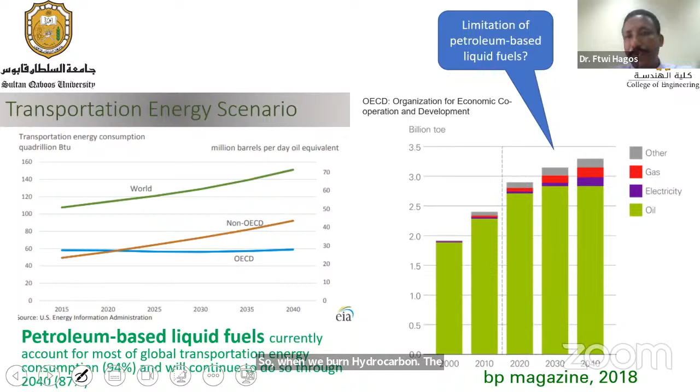So when we burn hydrocarbon, the limitation we have is because the carbon ratio in the mix is too much, then there will be huge generation of carbon dioxide. So the global CO2 emission from the transportation sector is one of the highest. As you can see from this figure, it stands at second.

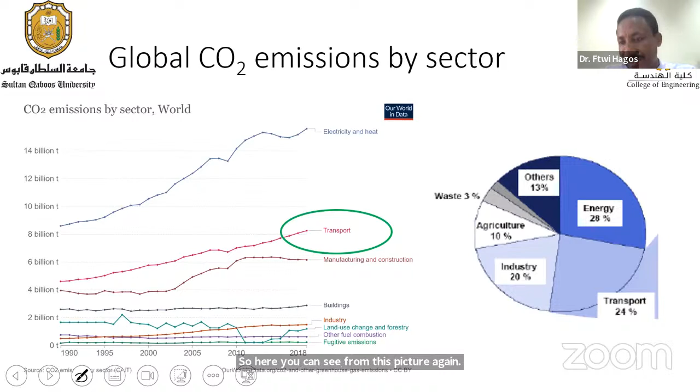Unfortunately, while the amount of CO2 production from the energy sector with some sectors is decreasing, with transportation it is still increasing at an accelerated level. So here you can see from this figure again, the transportation sector stands second in the generation of CO2 emission. And out of this, road transport is taking around 74.5%.

Based on this prediction, by 2050 the transportation sector will emit around 12 gigaton of CO2 equivalent per year, which is up from the current 8 gigaton of CO2 per year.

So these are the main challenges which the world is trying to address in many ways.

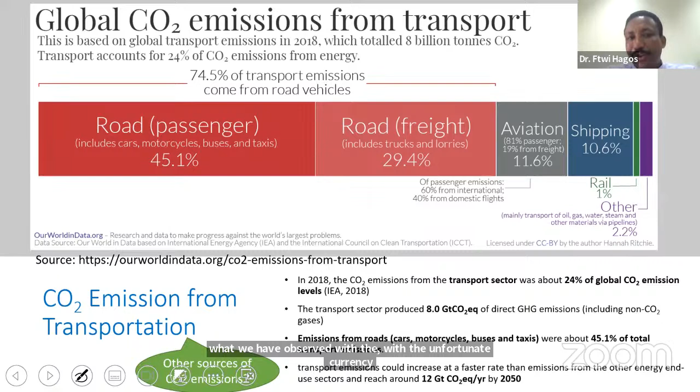What we have observed with the unfortunate occurrence of COVID-19, in fact, it was a blessing for the energy sector, especially for emissions. It was like a rally for the world, so there was a decline in the production of CO2. And of course, there was less activity, and as a result we had less consumption of energy, and subsequently we had less production of CO2.

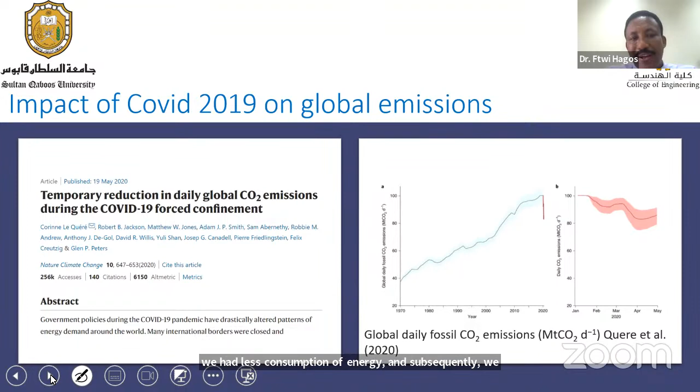Unfortunately, immediately the recovery started, the production of CO2 also picked up. Even though there was a discussion by world leaders that recovery should proceed in a sustainable way, many countries preferred to continue the same old way. So many of them dropped that intention and started exactly the same carbon-based path. As a result, by 2021, the energy-related CO2 emission grew by 6%.

So my topic today is more towards the mitigation aspect, with hydrogen as part of the mitigation process. There are many ways we can mitigate CO2 emission from transportation.

One way is energy intensity reduction, just minimizing the amount of energy we consume. Well, with the current trend, that may contribute a little, but it cannot be the only solution. But if we try to reduce the carbon intensity of the energy source, that can contribute a lot while generating or utilizing more energy, but still with less effect on the environment.

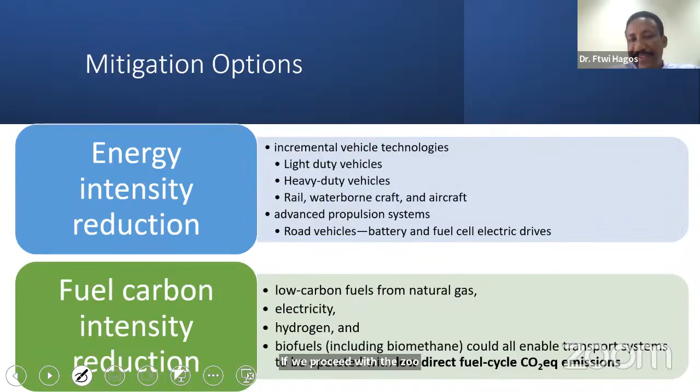There are different sources of energy which can be categorized as zero emission technologies, and there are lots of advantages and disadvantages associated with them. Our current practices are mainly focused on biofuels, synthetic fuels, bio-based fuels, or alternative fuels. Their impact is not as such because we have a wide range of limitations with them.

Like, for example, if you consider biodiesel, even though it has huge potential, we cannot utilize it fully into our current engines. So the only way we can use it is by blending it with carbon-based fuel. The same is true with bioethanol and bioalcohols. And with the others, like hydrogen energy as a combustion engine fuel, or hydrogen energy as a fuel cell fuel, or battery electricity.

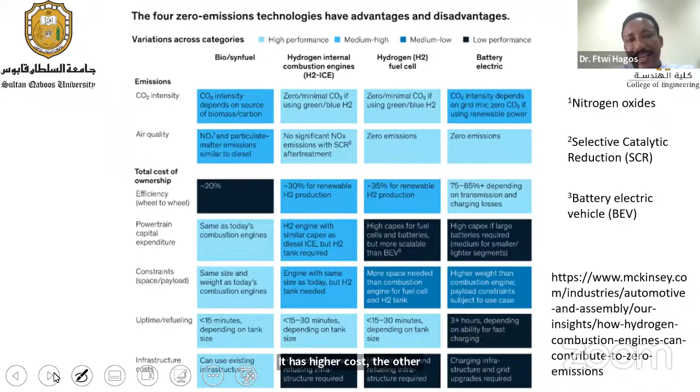Then the limitations with battery electric, what we have is, one thing, it has higher cost. The other thing is it has lower capacity, especially with the energy density. It has 400 megajoule per meter cubed in comparison to 34,600 megajoule per meter cubed of gasoline.

So this is one of the biggest barriers, in addition to those mentioned in the previous slide. And as you can see from the market aspect as well, because we have not much alternatives on the market, still the market for electric vehicles is growing, but the growth doesn't take into consideration the huge demand available for the vehicle market.

So as you can see, the current state of the market, in 2021 around 16.5 million cars were on the world road. In fact, this is an increase from 2018 by 3 times. And in 2022, in the Q1 market, about 2.2 million electric vehicles have been sold. In fact, half of the market is available in China.

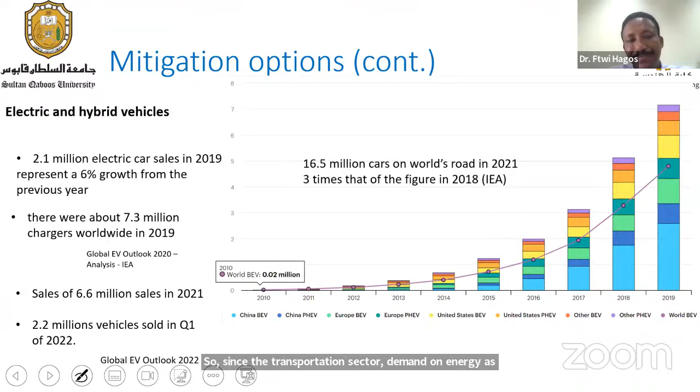So since the transportation sector's demand on energy as well as on vehicles is huge, we cannot substantiate with electric vehicles only. So we need to think about hydrogen fuel cell as well as hydrogen combustion engine.

The challenge with this: still the technology is recent, so there is more to be done, especially to expand the market.

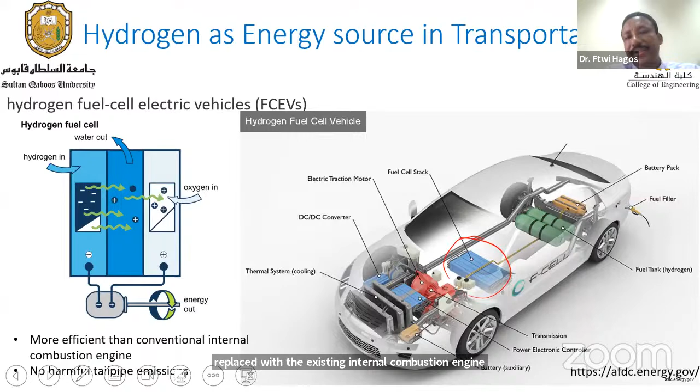As far as the hydrogen internal combustion engine is concerned, the setup is similar. The only thing is the fuel cell is replaced with the existing internal combustion engine. So hydrogen is utilized as fuel with existing internal combustion engines, more preferably spark ignition engines, but there are also efforts to utilize hydrogen energy in compression ignition engines. And there are also works underway to utilize hydrogen energy in the aviation industry.

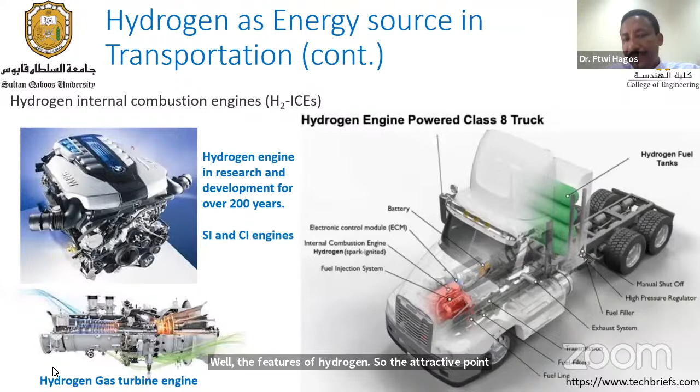So what are the features of hydrogen? The attractive points here are the energy content and the wide range of flammability limits, the higher auto ignition temperature, and higher octane number, which are more convenient for improving the efficiency of the combustion chamber.

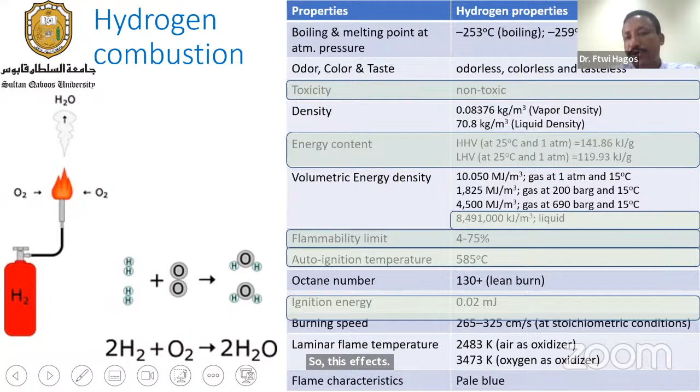The other thing is about the burning speed, which has higher laminar flame speed, and also the laminar flame temperature is high. Because of this effect, the combustion efficiency can be improved, but we have some challenge, especially with higher laminar flame speed: controlling the combustion process is a big challenge.

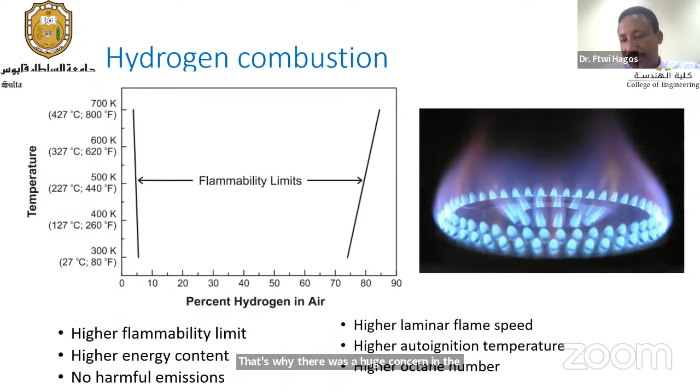That's why there was huge concern in the past. Hydrogen energy in the combustion chamber is not a recent scenario; it has been in research and development for over 200 years. We have 4 stages or phases in hydrogen usage for internal combustion engines: the early 19th century, the early 20th century, the 1970s fuel crisis, and the current one. The current one is motivated by the decarbonization drive, and hydrogen has become a center of focus as a result of its potential for long-term storage of energy.

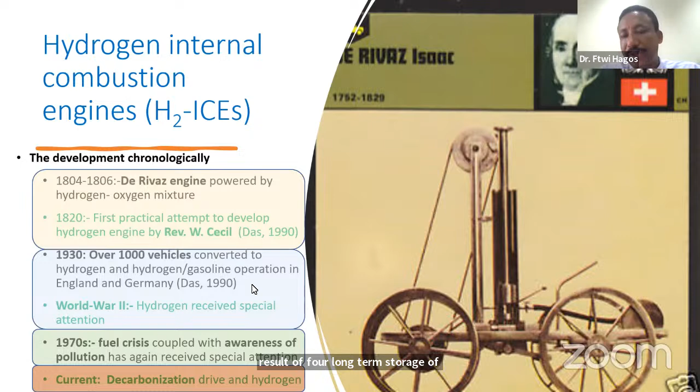So the challenge in the past was that the production of hydrogen itself was based on carbon-based fuels. Because of the production of hydrogen, up to 830 million tons of CO2 used to be produced. So hydrogen was not a solution in the past because it was being produced from carbon-based fuels.

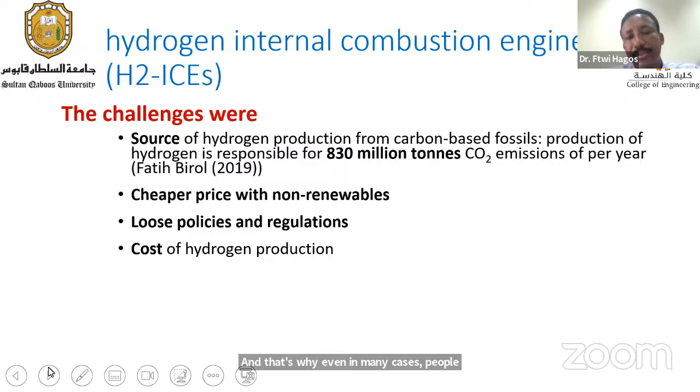The other challenge is cheap prices of non-renewables as well as carbon-based fuels, and loose policies and regulations which were not favorable for the use of hydrogen as a fuel. Cost of hydrogen production itself in the old days was quite expensive, and that's why in many cases people used to prefer to use syngas instead of hydrogen.

Storage of hydrogen was also a challenge. Nowadays, because of innovations, this issue has been slightly solved. And combustion related, as I mentioned in my previous slide, combustion control is one of the concerns.

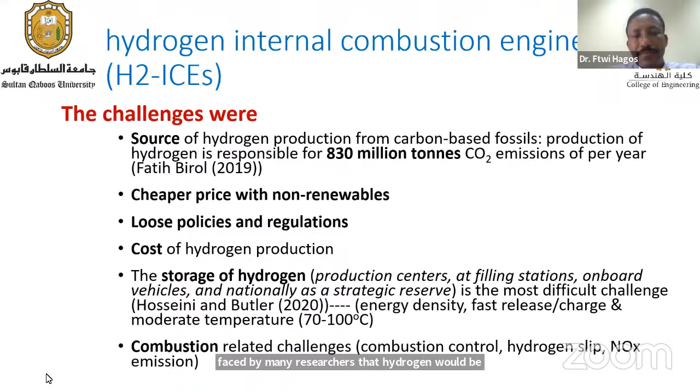But despite all these concerns, it was prophesied by many researchers that hydrogen would be the sole non-petroleum based commercial fuel in the future. This was stated by Prof. Das in the 1990s in one of his papers in hydrogen energy.

So what has been changed in recent years? Excuse me, Prof. Ftwi, I think we have 5 minutes left. Thank you.

All right, okay, I will try to conclude. So we have some driving factors or driving forces which have led us to change our status quo, among which are some listed here. Because of this challenge, many countries are shifting towards renewables, and decarbonization has been the motto for the world now. Net zero emissions have been proposed by 2050.

Share of renewables is increasing globally. When we are designing renewables, because of their intermittent nature, we need to design with higher than their capacity, because we need to look at the base load. So there will be surplus of electricity when they are generating at their peak, and as a result we require long-term storage. Now hydrogen has started to serve as a long-term storage.

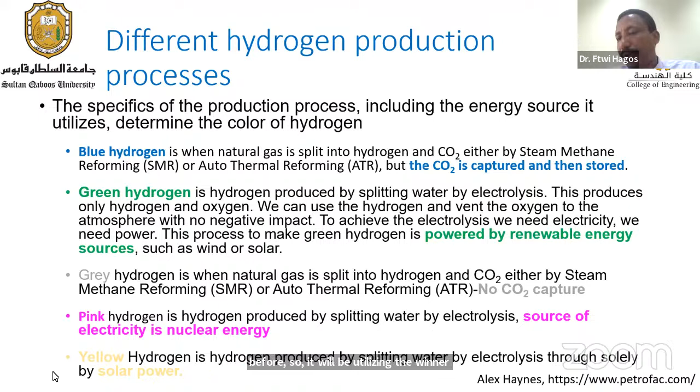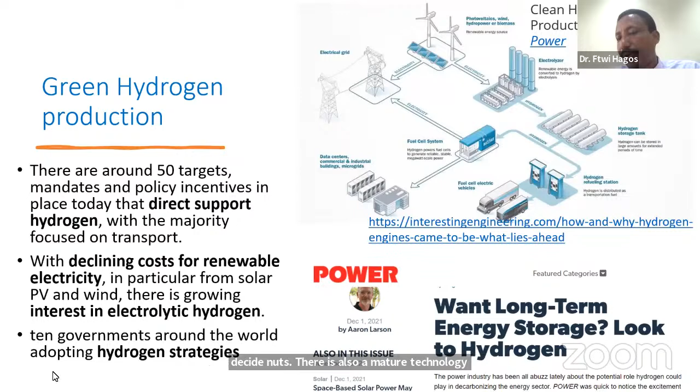So the green hydrogen production, I will not say more about this, it is quite the same thing I said before. It will be utilizing renewable energies for the generation of hydrogen by the electrolysis process. There are advancements in the electrolysis process, and the cost of production is reducing. Besides that, there is also mature technology on the combustion of hydrogen. Combining this, green hydrogen can serve as a means for the supply of energy to the transportation sector.

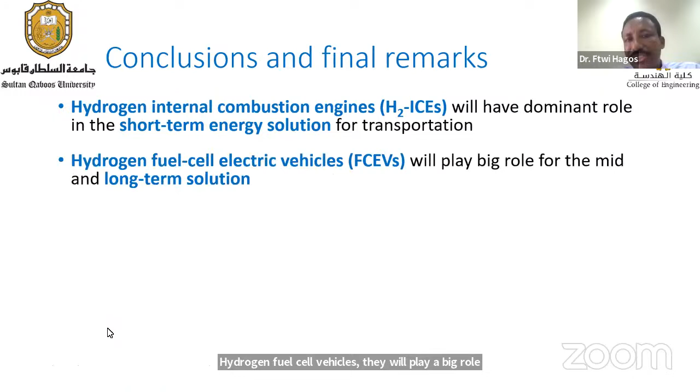So as a conclusion, hydrogen internal combustion engines can serve us as a short-term energy solution for the transportation sector. Hydrogen fuel cell electric vehicles will play a big role in the long term. The hydrogen energy market should be supported with infrastructure expansion as well as improving current policy and regulation. But the most important thing is addressing the global warming issue related to hydrogen, which requires controlling leakage in the upstream as well as the downstream. So hopefully, hydrogen will serve sustainable development.

Let me get back to one more important thing I forgot. We are requesting the original equipment manufacturers to give us different solutions while we are demanding them to give us electric vehicles. On the other side, we are asking them to give us fuel cells and internal combustion engine vehicles, then different technologies of internal combustion engine vehicles. So when the demand is diversified, the OEMs are also being stretched, and as a result they are failing in everything. This is also another challenge. So the world should have to be consistent with one form of energy source for driving our vehicles.

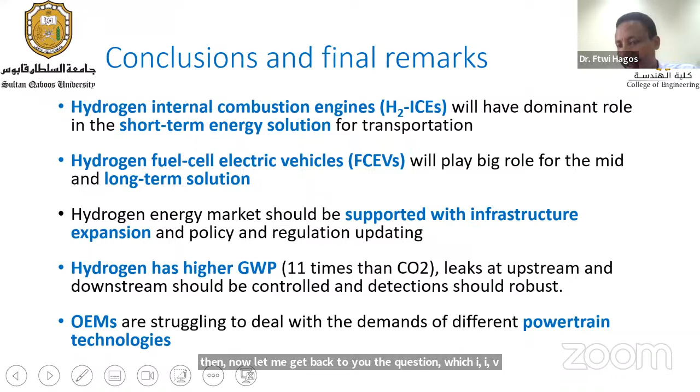So having said that, let me get back to the question I raised previously. Does my presentation address the question? Still not. I'm not here to just give an answer, because if I give an answer, it's like a promotion. The question will motivate us to think and to look after this, so it will be like our communal effort to address the issue and participate in the process. With that, I have finished my presentation. Thank you all, I really appreciate it.

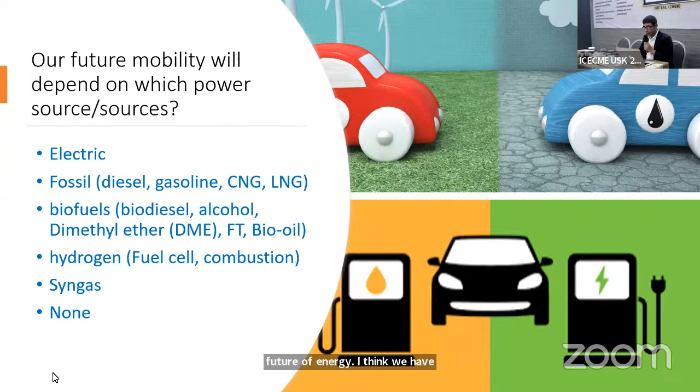Please mention your name. Thank you very much, Dr. Ftwi, for the presentation. I have one question about the future of mobility based on green energy. How about the economical side of these projects? I can only imagine the electric car is quite expensive, so not everyone can afford it. How about your research? Thank you. Oh, my name is Raihan. Thank you.

Yeah, you can answer directly. All right, thank you very much. So this is a very good question, and yes, the economic aspect should also be taken into consideration.

As I mentioned in my presentation, the motivating factor for hydrogen as a sustainability option is the economic aspect as well, because the cost of production of hydrogen is declining. Also, the production of hydrogen is not purely for generating hydrogen only. We are using hydrogen as a means of storage for surplus electricity production, so we are killing two birds with one stone. That will help us decrease the cost of energy in the automotive sector further. So that's the aspect we have here.

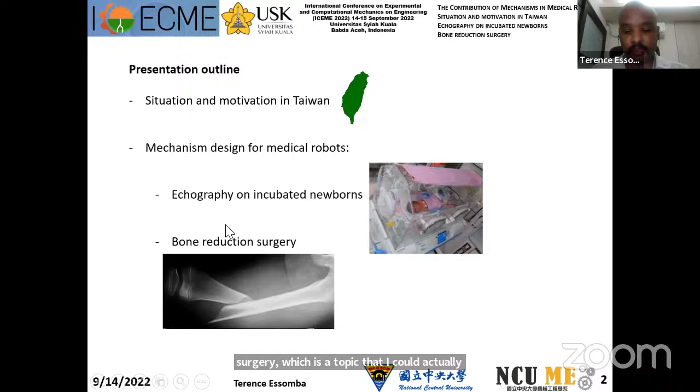Okay, please. Okay, so again, thank you, Dr. Irwansa Idram, for this nice introduction. My name is Terence Essomba from National Central University in Taiwan. The objective of this presentation today is to introduce the contribution of mechanism science and mechanism design to the design of medical robots. In this presentation, I will first briefly introduce the situation in Taiwan on medical robots, and then illustrate two examples, two medical applications that I personally addressed with medical robots. The first application will be echography on incubated newborns, and the second application will be bone reduction surgery, a topic I actually collaborated on with Professor Irwansa Idram.

So let's start with the situation and motivation in Taiwan. Taiwan is considered to have a very advanced healthcare system. It's ranked 9th in the International Healthcare Index, and it's also among the top 10 countries in medical tourism destinations, meaning many people actually come to Taiwan for medical treatment. So it is a very advanced healthcare system.

If we switch focus to medical robotics, Taiwan actually massively uses medical robots compared to the size of its population, roughly 23 million Taiwanese people. If we consider just the most famous medical robot in the world, Da Vinci, since it was introduced in Taiwan between 2004 and 2021, that robot has performed more than 50,000 surgeries exclusively. And by 2017, that robot performed more than about 60% of all considered surgeries.

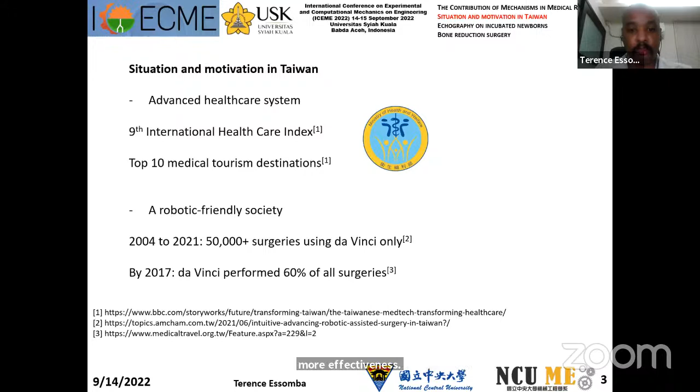So at the end, it shows that people in Taiwan are very accepting of medical robot technology. One thing to mention is that the majority of surgeries performed by medical robots are not refunded by health insurance, and yet people are still willing to take surgery because they seem to be aware that using medical robots brings more safety and more effectiveness. So to conclude, Taiwan massively uses medical robots compared to its population.

During an interview, he mentioned that although he fully trusts his engineers and his technology, he admitted he was quite scared the robot might harm him during the process. He allegedly asked his engineers to work on this aspect to make the robot feel less imposing to the patient, and also to make it seem safer.

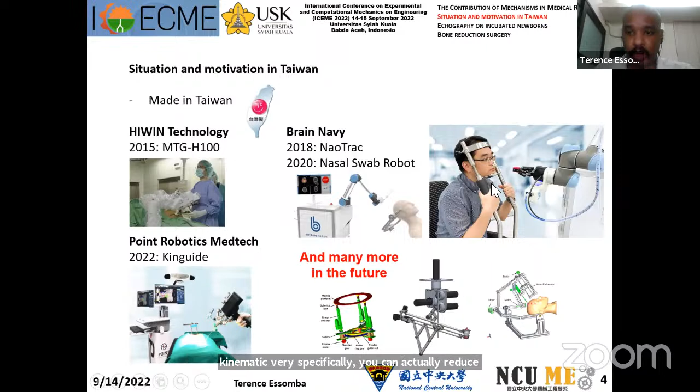The robot used for this application, for example, is a 6 degrees of freedom robot, meaning it has 6 joints. But to collect a nasal swab, you don't need so many degrees of mobility. So if you address the kinematics specifically and propose a mechanism tailored to that motion, you can actually reduce the size, weight, and cost of the robot.

So to illustrate that, I'm going to present 2 medical applications I have worked on. The first application is a mechanism we imagined for intracranial echography on incubated newborns.

The situation is that when some babies are born prematurely, they are extremely fragile to infection and physical contact, so they must be placed in an incubator for a while, and cannot be taken out unless there is an emergency. During this period, very regularly, the doctor has to perform intracranial echography to monitor the development of the brain.

During the early stage of postnatal development, doctors have to go through an access panel and insert a very small ultrasound probe, placing it on the fontanelle of the baby. The fontanelle is the soft zone on the skull where, because of the soft tissue, the ultrasonic wave can still pass through. So the doctor has to drag the echograph from one baby to another. That procedure is very repetitive and uncomfortable, since he has to put his arm into the incubator and manipulate the ultrasound probe.

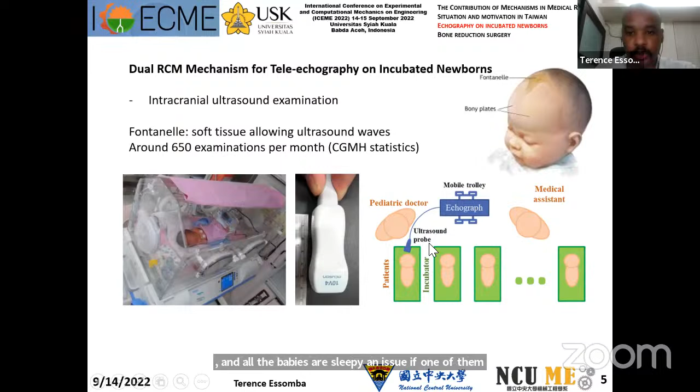He has to be very careful, because in the room there are about 20 to 30 incubators, and all the babies are sleeping. If one of them wakes up, then all the babies will wake up. So this is a very delicate process.

Because it's a very repetitive and uncomfortable process that he has to do several times a day on several babies, our idea is to propose a tele-echography robot with a mechanical arm that will go inside the incubator to perform the examination. The doctor can remain in his office, and using an ultrasound remote control and a communication system, he can remotely control the robot. The robot will be manipulated by a medical assistant from one baby to another. So here our focus will be on how to design this mechanical arm.

Before proposing a specific mechanism, we need to study the motion that the doctor has to do to perform the examination. If we know more about the kinematics, we know what kind of mechanism can generate that kinematic.

So we went to the hospital with our motion capture equipment, an optronic system. We placed a motion tracker on the ultrasound probe, and we asked the doctor to simulate an examination. It's quite easy to simulate because he always has to take the same image cuts on the brain, and then he will analyze the image later. That's why it's very repetitive: he takes a few cut images, saves them, and then goes to observe the images in his office. So it's very fast and very repetitive.

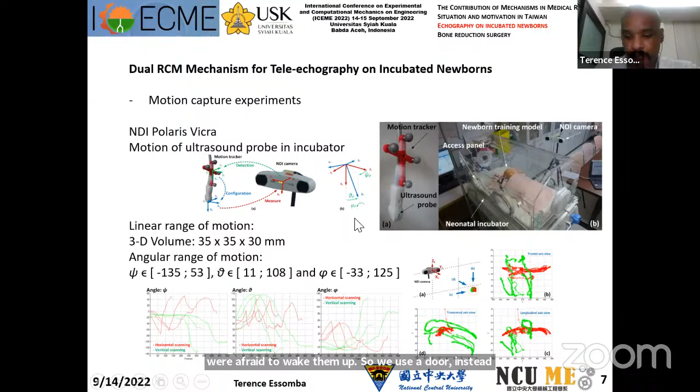We were not allowed to go on a real baby because they were afraid to wake them up, so we used a doll instead of the baby. By analyzing the data we collected, we came to the conclusion that the motion is quite particular.

We have two remote centers of motion, meaning there are two centers of rotation. One center of rotation is located at the access panel - basically the arm has to go inside and rotate around this point to avoid any collision. Once inside, there is another center of rotation that the ultrasound probe has to turn around inside the incubator. So the proximal remote center of motion is basically to place the tip of the ultrasound probe linearly, and the distal remote center of motion is to actually rotate the ultrasound probe around these points.

So how to propose a mechanism? One of the things is that we do not want any motor inside the incubator, because the motor makes noise, and we don't want to disturb the baby as it's sleeping. So this is an additional requirement. Now, how to propose a mechanism that can perform this very specific motion?

We came up with a specific idea that combines two pantographic linkages in series. One pantographic linkage is mainly focused on the proximal remote center of motion, which basically displaces the tip of the ultrasound probe. At the end of this pantographic linkage, you have another pantographic linkage that generates the distal remote center of motion, taking care of the rotation of the ultrasound probe. So the entire mechanism is almost decoupled: the proximal pantograph linkage manages exclusively the linear motion of the probe, while the distal pantographic linkage manages mainly the rotation of the probe.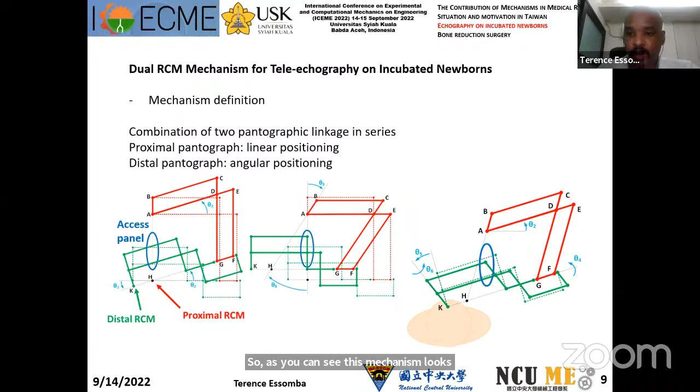As you can see, this mechanism looks quite complex, with many linkages interacting together. But if we carefully study the kinematics of that mechanism, it's actually possible to modelize the kinematics of this complex mechanism with a very simple one - a serial mechanism with just three linkages.

Because we have a very simple kinematic linkage to simulate the kinematics of that mechanism, we can rely on geometric methods for the resolution of the kinematic model. So you can see that the equations are very simple.

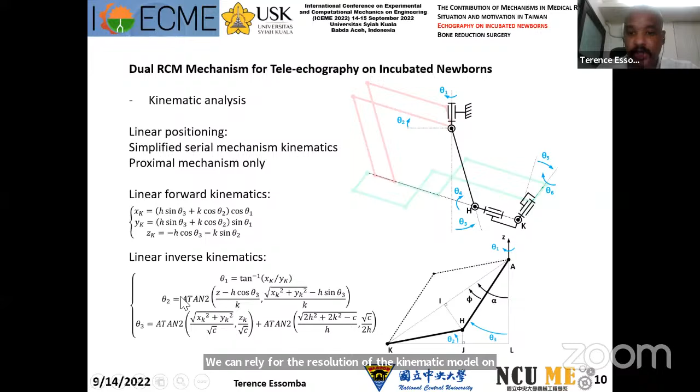Now for the angular kinematics, we need to use rotation matrices, basically, except for the third joint, because based on the mechanism, the third joint does not affect the rotation of the mechanism. So this is a little more complex, but still very accessible. We use one rotation matrix calculated with the angle we want to use to position the probe, and another rotation matrix calculated using the joints, the rotation at each joint.

By this process, we can identify the forward kinematic model, the angular forward kinematic model. For the inverse kinematic model, we use pretty much the same method. However, we need to isolate the three last angles that manage the rotation of the probe. Angles 1 and 2 are actually calculated through the linear kinematic model because the mechanism is almost decoupled. But the method is almost the same, so we can identify the joint variable for the angular inverse kinematic model.

The kinematic model is very simple because we can simulate the kinematic of this complex mechanism with a very simple one. After that, we design our mechanism linkage and our prototype. This is a picture of the prototype, and we use this cage, because we don't have an incubator, to simulate the position of the incubator.

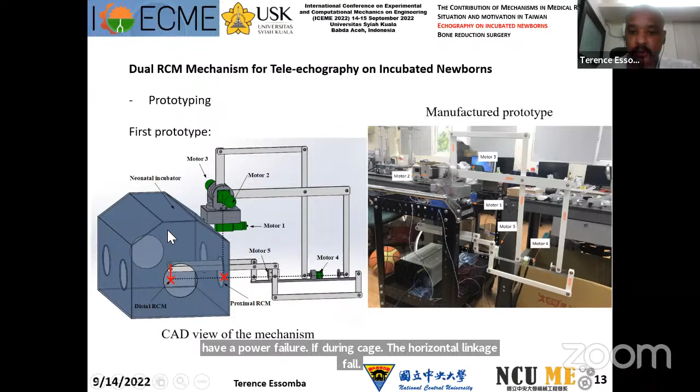So this is our first prototype. And then we come up with another prototype where you can see the mechanical architecture is different, but it actually generates the same kinematic. So this is our second prototype.

Now we hope that we can perform some experiments, not on a real baby, but maybe on an incubator or using some doll. So this is how we were able to address the mechanical challenge of manipulating a probe with two remote centers of motion. This is something that was never proposed before. No one ever proposed a robot for the examination of babies in an incubator.

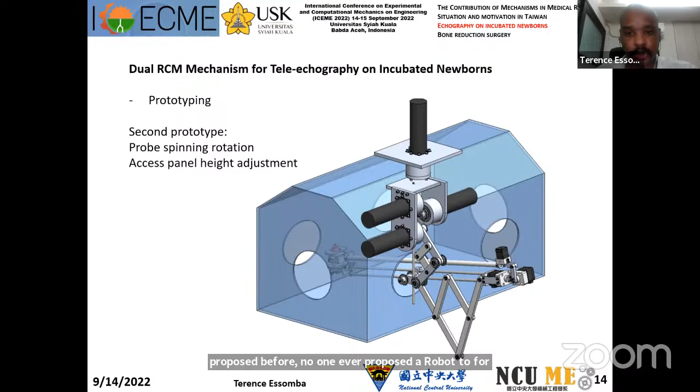So now the second illustration is bone reduction surgery. The idea is that in some fractures, very severe fracture, the bone can be completely separated into two parts because it's attached with tissue and muscle. They will pull the bone in different directions. In that condition, it's impossible to heal because the bone must be physically connected so it can heal.

So before the ossification, traditionally the surgeon will perform an open surgery, and this is actually a very simple one. There are even worse open surgeries to physically access the bone, and they will physically put the bone together. Then, because you have physical contact, the ossification can occur. The problem with that traditional method is that, first, open surgery is something in medicine we want to avoid as much as possible because you have risk of hemorrhage, risk of bleeding, risk of infection, and it takes a very long time to heal from this type of surgery.

The problem with that traditional method is that since you have some physical interaction with the muscle, once you place the bone back into its original place, you always have some residual motion when you have to place the prosthesis. So this can cause misalignment.

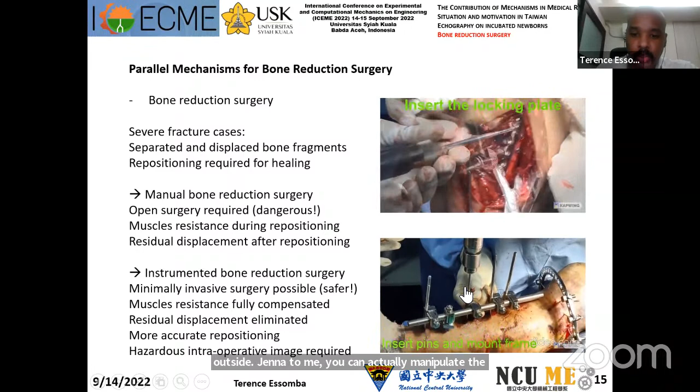A safer method is to rely on minimally invasive surgery, meaning that instead of opening the flesh of the patient, they will use a series of rods that they will directly insert, like some screws, through the skin and the flesh of the patient into the bone directly. By manipulating those rods from outside the anatomy, you can actually manipulate the bone inside. This means there is less risk of bleeding and infection.

The problem with this method is that since you don't see the bone inside, you need to rely on intraoperative images. Basically, you need to use X-ray, and X-ray is dangerous for people. If you take a few X-rays in your life, it's okay, but for a doctor who has to do it every day, at the end you have a risk of cancer or some medical problem. So this is a problem.

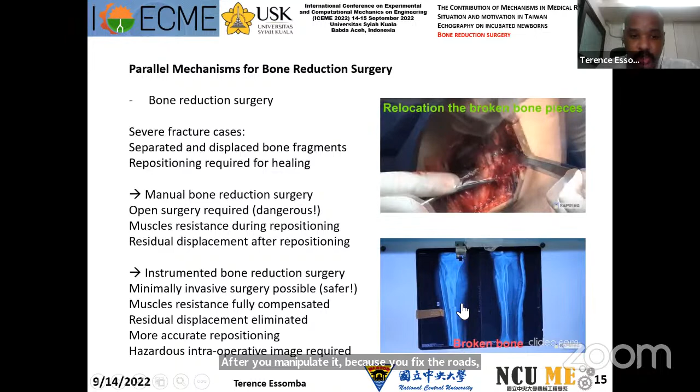Now, what they can also do is use a mechanical system to rigidly fix the bone. That way you can solve the problem of residual motion, because the bone is not going to go anywhere after you manipulate it, since you fix the rods physically, rigidly with a mechanism. But again, you have the problem with the hazardous intraoperative imaging.

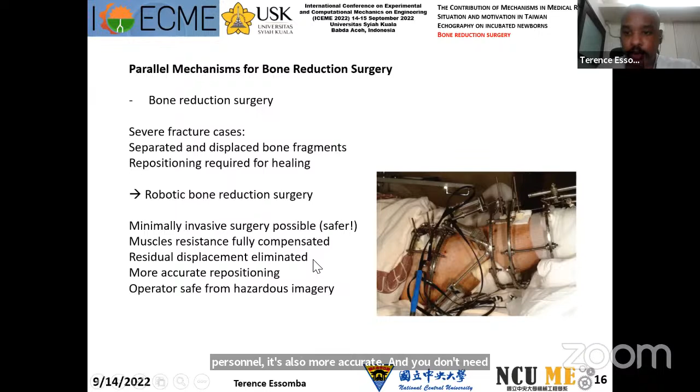Now, to solve this problem, you can use a robotic mechanism to guide the rods directly, so you don't need to be physically present to manipulate the robot to displace the bone. So not only is robotic bone surgery safer for the patient, it's also safer for the doctor and the medical personnel. It's also more accurate, and you don't have the problem of residual motion because it's rigidly fixed with a robot.

So there are several types of mechanisms proposed for this type of surgery. The most popular one is the Taylor spatial frame. This is a hexapod mechanism with 6 degrees of freedom, so you have full complete motion to control the 2 bones.

One bone is attached with one platform of the robot, and the other bone fragment is attached with the other parts, the other fragments of the robot. By moving the mechanism, you can move one fragment from another.

The problem with that mechanism is that the workspace is very limited. When you connect rigidly the bone fragment with the mechanism, you have to ensure the trajectory you need to do to reconnect the bone will be inside the workspace of the mechanism. If it's not, as you connect the robot physically with the bone fragment, you have to evaluate whether the trajectory will be inside the workspace of the robot, and that's quite a difficult task.

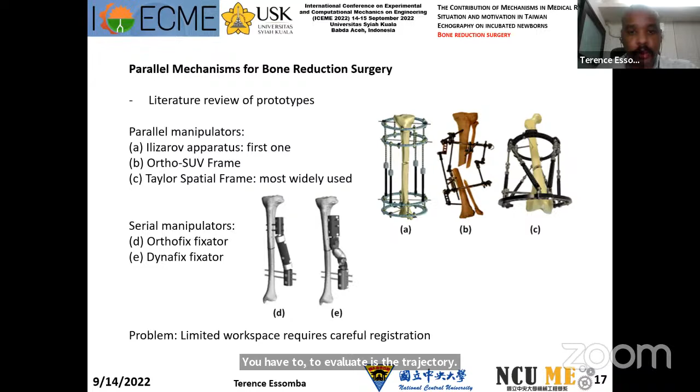So our work in this application was to propose a mechanism that has the same size in proportion with that Taylor spatial frame, but that can generate a larger workspace. Then it doesn't matter how you connect it with the bone, because the workspace is so large you don't need to worry about the trajectory being within the workspace.

Previously we proposed 2 different architectures that are hybrid mechanisms. We have a tripod mechanism connected with a planar mechanism. As you can see, the workspace of the mechanism in red is much larger than the workspace of the mechanism usually used in medical, shown in blue. The workspace is much larger for both prototypes.

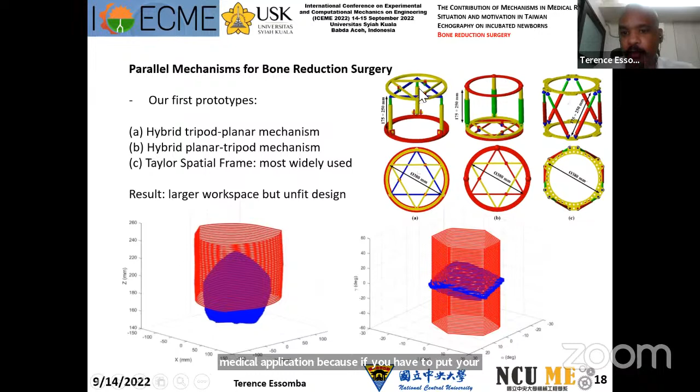However, the problem with this architecture is that, as you can see, you have many rods inside. It's very interesting from a kinematic and theoretical point of view, but when we want to design a real one, the design may not be suitable for a real medical application, because if you have to put your leg inside, you have very little available space for your leg or arm.

So then we turned to another concept, called the augmented tripod. An augmented tripod is actually a mechanism with 3 legs instead of 6, but because we add more degrees of freedom into each leg, we can still generate 6 degrees of freedom. In general, with parallel mechanisms each leg gives you 1 degree of freedom, but with this augmented tripod concept, 1 leg gives you 2 degrees of freedom. So with 3 legs, we have 6 degrees of freedom.

This is the first mechanism we worked on. It's not from our own invention; it was developed by a guy named Alizade. But the study he had was limited to the numerical resolution of the kinematic model, and no prototype or CAD were ever proposed.

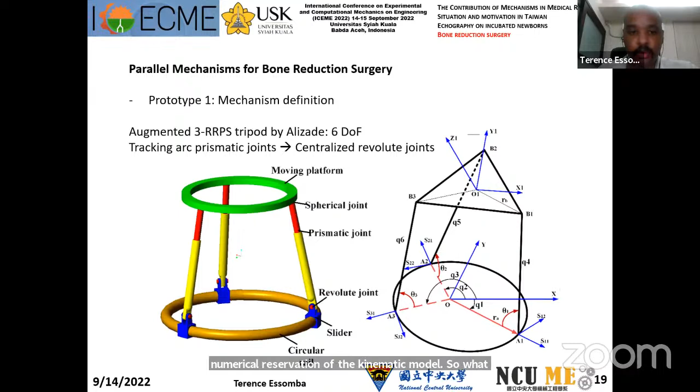So we took this concept and completed the theoretical analysis of that mechanism. We found an analytic solution for the inverse kinematic model and also for the forward kinematic model, although it's not visible in my slides, and also the velocity model, meaning the relationship between the speed of the joints and the platform of the mechanism. So this is the first prototype we worked on.

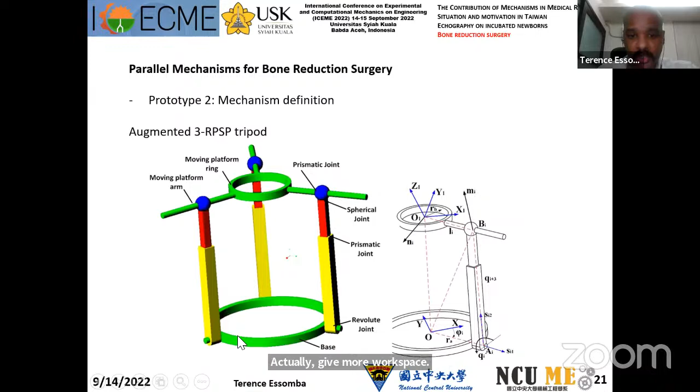Then we proposed a second prototype, which is a little more promising. It's the same type of mechanism, still an augmented tripod, but this mechanism gives more workspace. This time the mechanism is from our own design, so again we studied the inverse kinematic model, the forward kinematic model, velocity model, etc.

Then we studied the workspace for each mechanism and compared it to the workspace of the hexapod commonly used in medical applications, using the same dimensions. So basically, for two mechanisms of the same dimension, which one has a larger workspace? As you can see, for the first one, which was not our own design, the workspace is a little larger, but for our new mechanism, the workspace is much larger.

That means if you connect the two bone fragments to these two parts of the mechanism, you don't have much concern about the trajectory being inside the workspace, because the workspace is so large. So this mechanism is very promising. After that, we designed our own prototype and performed some simulated experiments. We bought a bone fragment that we cut in half with a specific cutting session, and we tested how easy it was to use this mechanism to reconnect the bone. Both mechanisms were effectively able to do it.

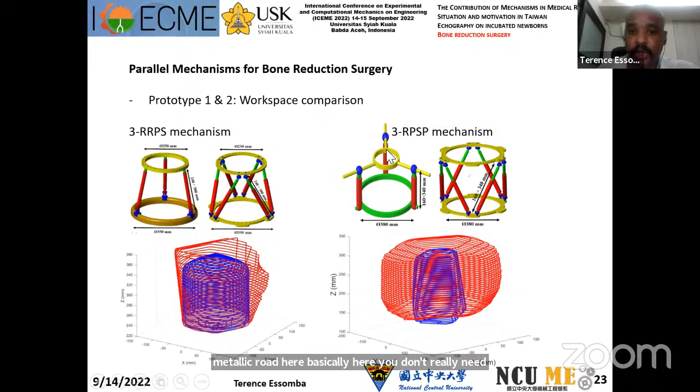What is important is that the metallic rods here, you don't really need to have this circular shape, you don't need to have this collar here. You can insert the rods directly into the bone, so the mechanism should be much lighter.

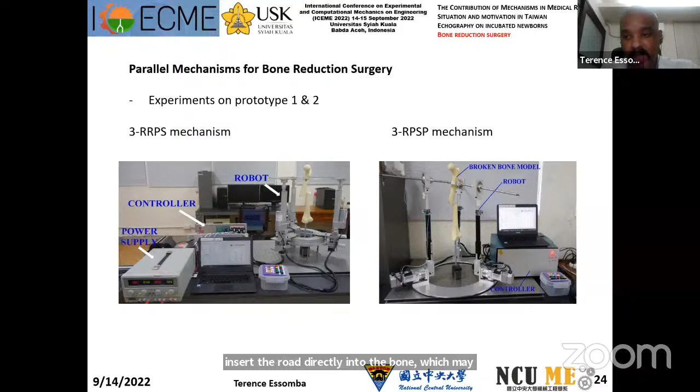So in our opinion, this mechanism is even more promising for bone reduction. We have only 3 legs instead of 6, and we have a larger workspace, and the design allows us to insert the rod directly into the bone, which makes the medical process easier.

So that's the end of this presentation. As a conclusion, we could see that by addressing medical robots through mechanism, by proposing very specific mechanism design, we can not only have better kinematics to generate motion, but we can also make the medical intervention safer. And also we can reduce the cost because we need fewer legs, fewer motors, and the robotic manipulator can be smaller, etc.

So here we could see how we can address the mechanical challenge of reaching, with a safe mechanism, the fontanelle of a baby inside an incubator, and how also to improve the workspace of a robot for bone reduction surgery.

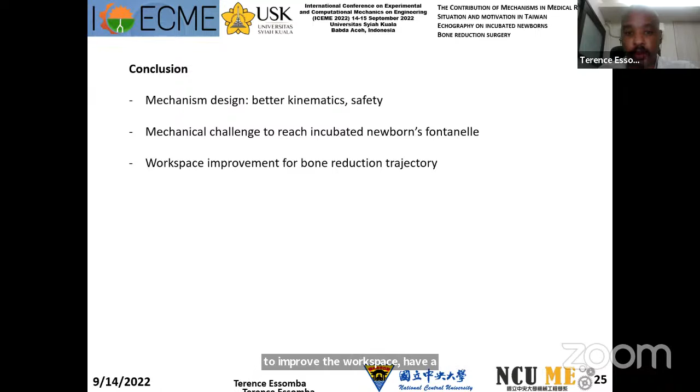So this is the end of my presentation. I hope you enjoyed it. Now I will be pleased to answer your questions. Thank you for your attention.

Thank you, Professor Terence, for your lecture today. There's a lot of knowledge, especially for me, to remind us of what you already touched on in terms of the kinematics, so we can see if we want to develop some mechanism for medical applications, we have to consider also the kinematics.

There are two statements that I noticed from your speech. The first one is that robots can make it safer in terms of the operation, and not only safe for the patient, but also for the doctor, because it can solve the doctor fatigue problem, which can be solved also by the robotic mechanism.

And then the second one, thank you for your presentation in terms of the newest research. The first one is the tele-echograph used for newborns in incubators, and then the second one, I think, is the parallel mechanism for bone reduction, which I believe one of your students also worked on, I think from Vietnam.

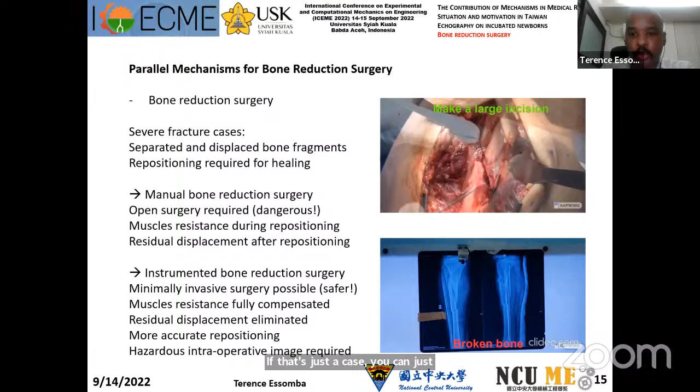And you could use titanium and metallic elements also, because another issue is that you need to sterilize the parts that will be in contact with the patient. There are basically two ways to address that. There are parts of the robot that must be in contact with the patient, otherwise you can't perform any surgery. And then you have some parts that could be potentially in contact, but not necessarily, for example the elbow of the robot. If that's the case, you can just use a plastic cover, and there are special products to sterilize it. But if this is a part...